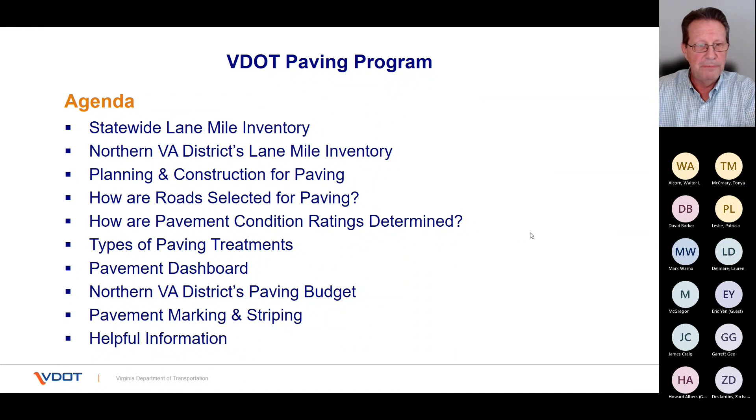So first of all, I just want to give the big picture. Up in Northern Virginia, we have over 14,142 lane miles in NOVA, which comprises Fairfax, Prince William, Loudoun, and Arlington counties. And then you can kind of see how many lane miles there are around the state for us to maintain.

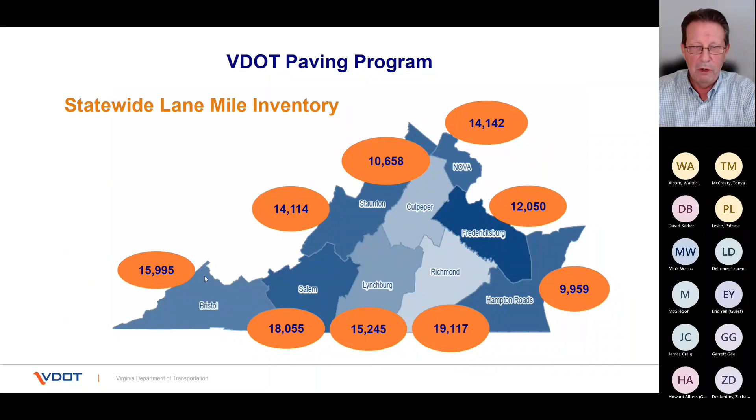In Northern Virginia district, Fairfax County comprises over 51% of those lane miles, the 14,200. Loudoun County makes up about 25% of it, Prince William 22%, and Arlington County 2%. The reason Arlington County's is only 2% is because they maintain most of their roads, where we maintain the interstates and some of the very large primaries.

So as I mentioned early on, we're already started into the paving construction season. We've had a very mild winter, and that allowed us to get started a little bit earlier this year in March, and we're actually catching up on a couple that got carried over from last year here in March and April.

And the season goes through till about October. We stop milling around early October so that we can finish up paving and then have enough warm weather after that to put down any pavement markings necessary to finish up the projects.

But every year we go through this process. It's an annual process. Right now, we're already gathering information for next year. During the summer and fall, we'll review that data, start setting up contracts and schedules preliminarily, and eventually during the late fall, we'll advertise those contracts to contractors for bids.

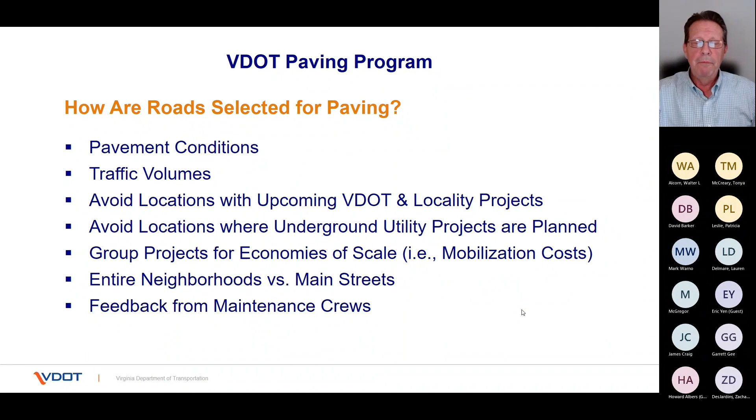So how do we collect the data? We use what are called ARAN trucks. They're automatic road analyzers. It's very technical, but has a lot of equipment on it.

It takes photo images and runs analyses to look at pavement distress, roughness, texture, and rutting. It does digital scanning, takes measurements and imagery and video, so that our infrastructure team can go back and look at some place that may show up as really bad or something strange.

They can go back and look into that data that's all recorded from these trucks. We have contracts with the makers and users of these trucks, and they drive the roadways and record it for us every year.

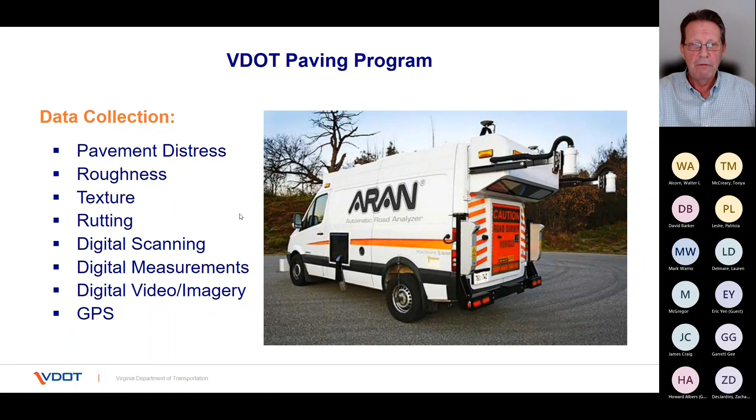So how often do we do it? Annually, we do this on the interstate roads, all primary roads, and all of our high volume secondary roads. High volume secondary roads are those that have an average annual daily traffic of 3,500 vehicles per day or greater.

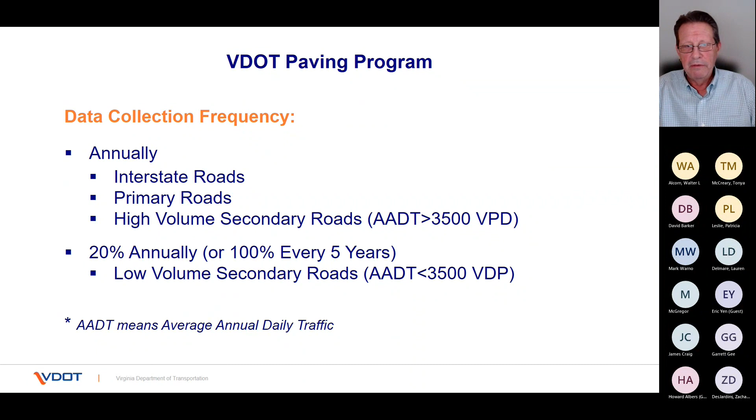Low volume secondary roads are those that are less than that 3,500, and we do those about every 5 years. Essentially, we get 20% every year because there's so many of them, so we get the full 100% every 5 years. Your low volume secondary roads are typically your neighborhood roads.

As a criteria set by the state, we have to meet what's called our critical condition index of 60%. That's the borderline between fair and poor. Obviously, if money were no object whatsoever, we would always shoot for excellent or good at least. But budget and available funds do come into play, and we have to set a target of expectation for ourselves and for the community.

So we have a 60% CCI or greater as being that target, depending upon the type of roadway. And you can kind of see the pictures here of the varying conditions, how they may look. I will say that when it comes to neighborhood roads, over 40% are considered very poor to poor.

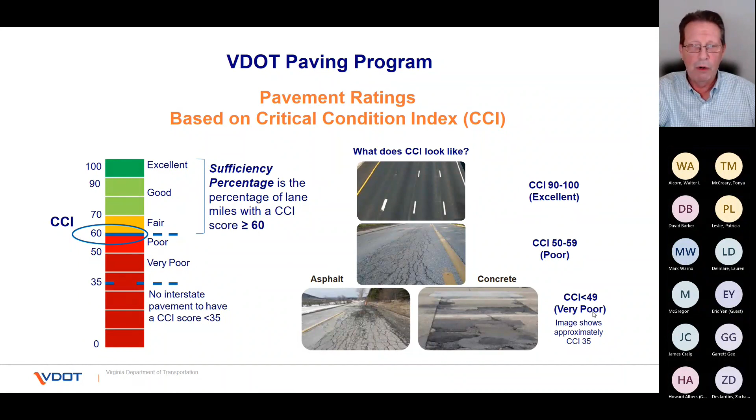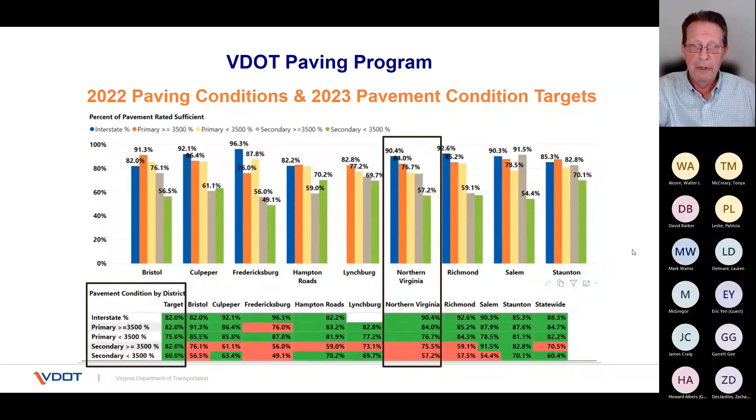The top layer is to provide preventive maintenance. For lack of a better comparison, I equate it to what many of us would do with sealing our driveways. We do a slurry seal, latex, and a chip seal. We do patching and crack seals, and that's to provide preventive maintenance allowing that pavement to last 2 to 5 more years until we can get to repaving that road.

Then what we call plant mix is what everyone would know as milling it, then overlaying it, and we do that anywhere from 2 inches to up to 4 inches deep, depending upon how bad the condition of the current paving is. In extreme cases, there are roads that are 70 years old that have been paved over multiple times, that originally was perhaps a gravel road and even at one time a horse path road, believe it or not, that goes back a long way.

In some of those cases, we will actually excavate the entire roadway and reconstruct it. That rarely happens, but it does happen in segments in some places where we have real problems with the roadway.

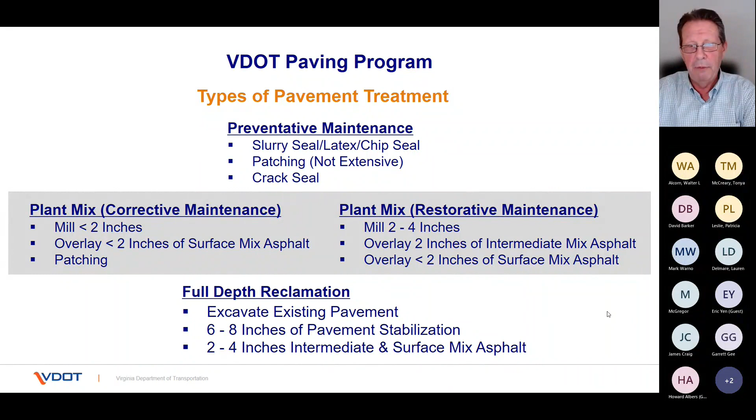So every year, one big question is what do we have as far as our budget goes. Our 2023 budget for this year is $123 million towards paving in Northern Virginia District. You can see that's somewhat on par with what we've been the last 5 years. It is slightly up from last year.

But with the cost of inflation, or the impact due to inflationary costs, it's a little greater cost to us in terms of cost per lane mile. So last year we were able to do a little over 1,000 lane miles. This year we're at 954.

One big difference is that we are applying over 80% of our budget on the secondary roadways, mainly on the neighborhood roads. As you saw earlier, the condition ratings for interstate and primary, we have achieved our goals and managed to maintain them, and we're still playing catch up on all the secondaries from the period of the late 2000s into the early 2010s when we went through a bit of a recession.

So our infrastructure and maintenance teams overall have determined that about 43% of our low volume secondary roads, or neighborhood roads, have a Critical Condition Index rating, CCI, in the 30s and 40s, which is considered very poor. That's why we're continuing again this year, as we have the last several years, to put a big emphasis on our neighborhood roads.

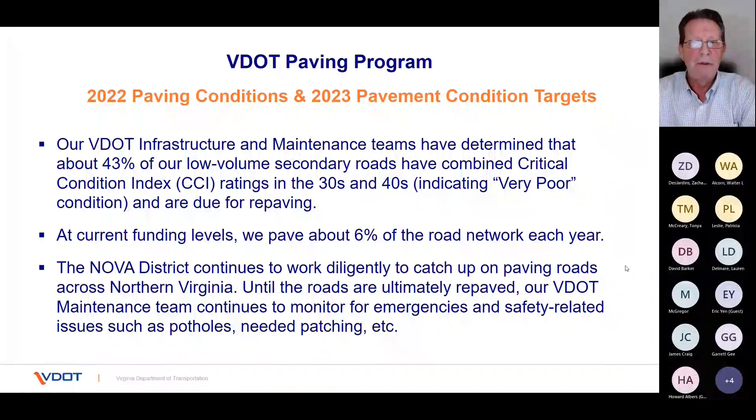So when we go out and repave roadways, it has existing pavement markings, and typically our contracts are set up to replace in kind. That is, we put back the double yellow center lines if that's what exists, the white edge lines if that's what exists, whatever may be there.

In the second bullet here, we sometimes do make some minor adjustments to add edge lines. We may adjust a crosswalk slightly if it wasn't quite perpendicular in the roadway. We may add what are called high visibility crosswalks, which are the kind of bar-like crosswalks you see, as opposed to two lines going across the roadway.

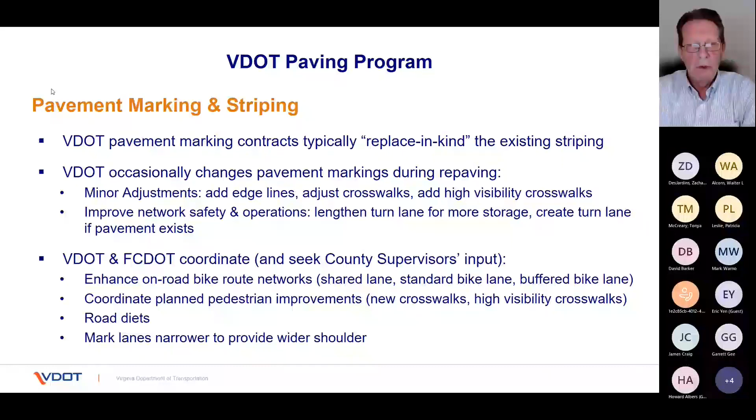So overall, if you at any time have a problem with a roadway, a pothole, deteriorated pavement, or some problem like that, you can reach out at the website shown on my screen at my.vdot.virginia.gov, or call the number shown on the screen, 1-800-FOR-ROAD, to let us know about a problem, and we'll contact our maintenance department, have them go check it out, and try to address it.

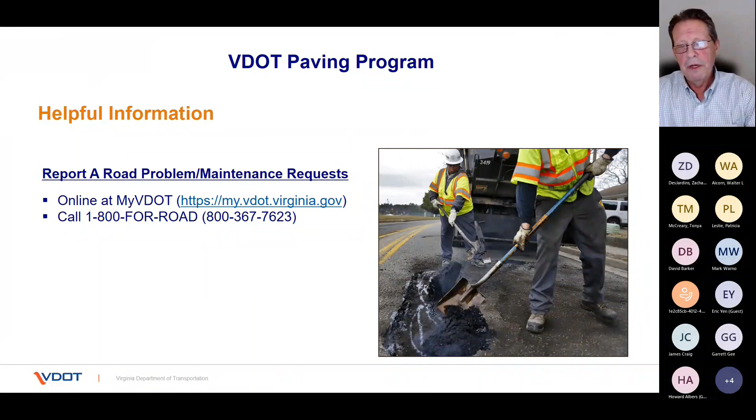So for the second part of the presentation, I wanted to jump back to show you how to use what I showed earlier as a static image of the 2023 paving program. Give me one moment to change screens here.

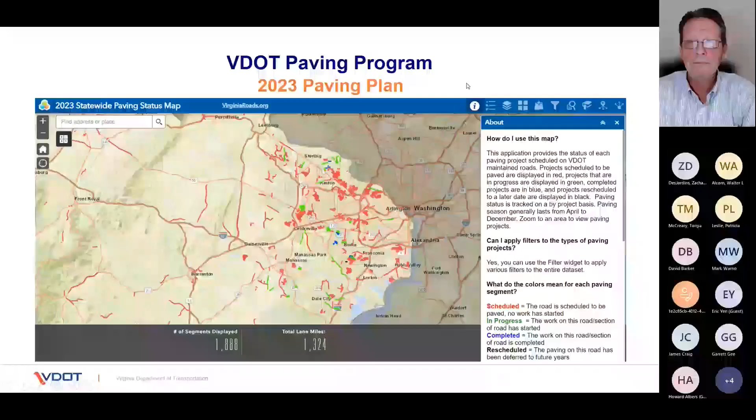All right, can you see my screen with sort of an image of what I showed you earlier? Okay, good. All right, so I'm going to back out a little bit.

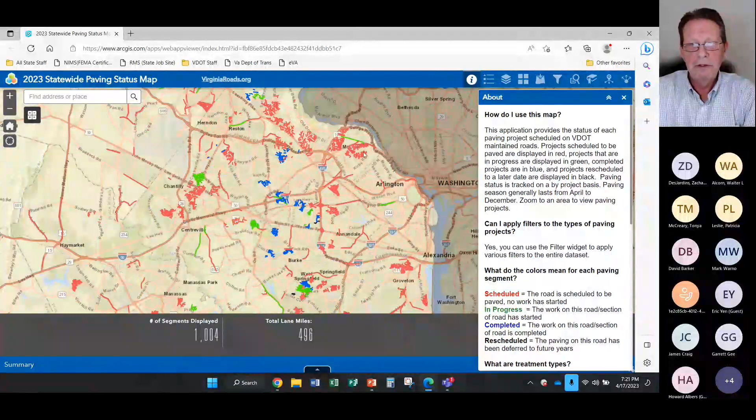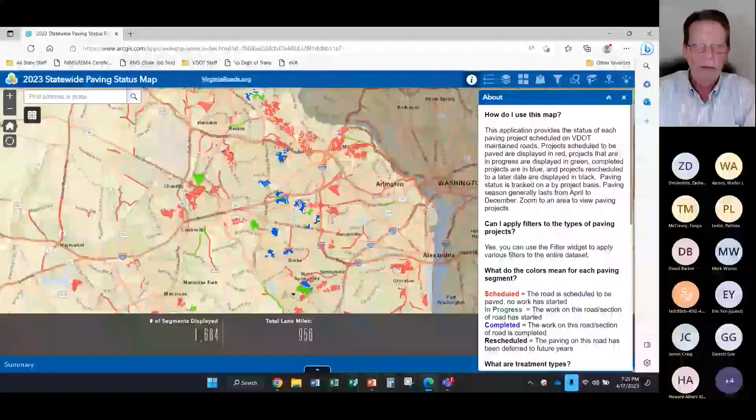You can kind of see this is all of Northern Virginia, with the Loudoun Dulles Airport and Loudoun County line over here, Prince William County line down that way. So looking in the center, in the Hunter Mill Providence area, and zooming in a little bit, you can see Vienna. You can see where some roads or neighborhoods in particular are going to be repaved, as well as some of our interstates and a couple of our primaries. And you can see several in blue that we've actually already completed.

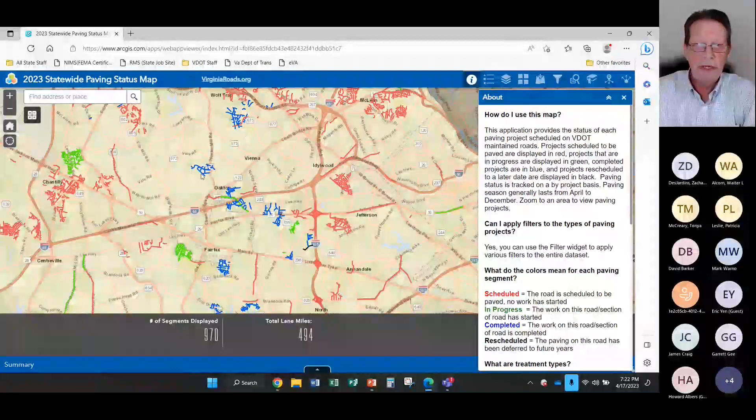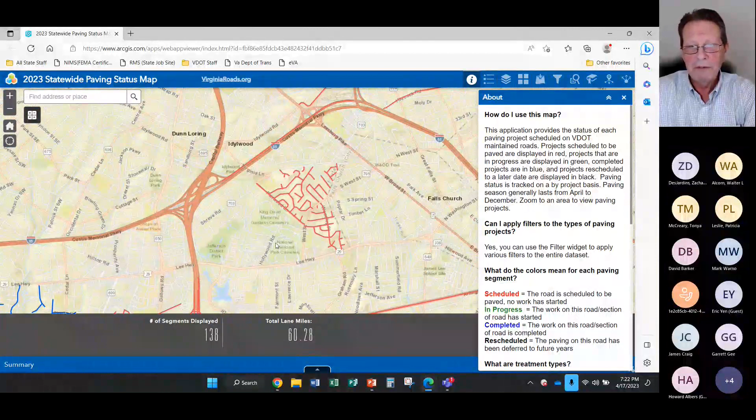One thing I wanted to show everyone about this map is that everyone can use it. It's on the link. If you have any questions about your neighborhood, I'm going to focus in on this one right here for the moment, called Poplar Heights, next to Westwood Park off of Shreve Road. What you can do is click on that roadway, and it brings up a dash that shows you the project manager name from VDOT, their phone number, their email address, and what contractor they're using to perform the work.

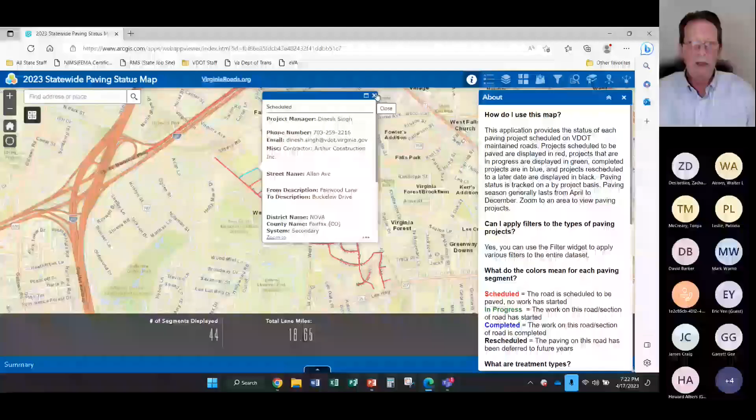One thing I want to explain is our contractors are given not a certain week or even a certain month that the work has to be done—they're given a period of time. In other words, from notice to proceed in early or mid-March through maybe August of this year, depending upon which neighborhood it is.

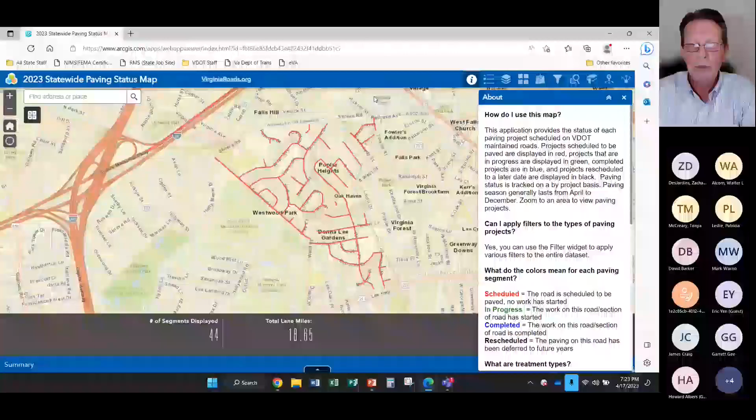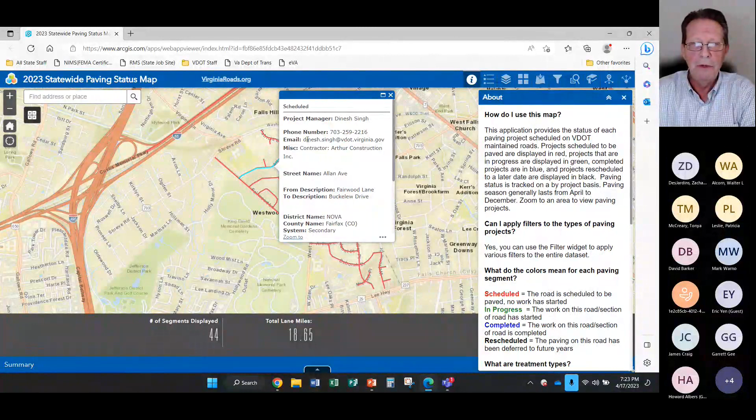So if you have a question about when they're coming to your neighborhood, or during the process of them paving there's an issue or question that you have as a citizen, you can call this up and write an email to that project manager, and they will circle back and answer your questions.

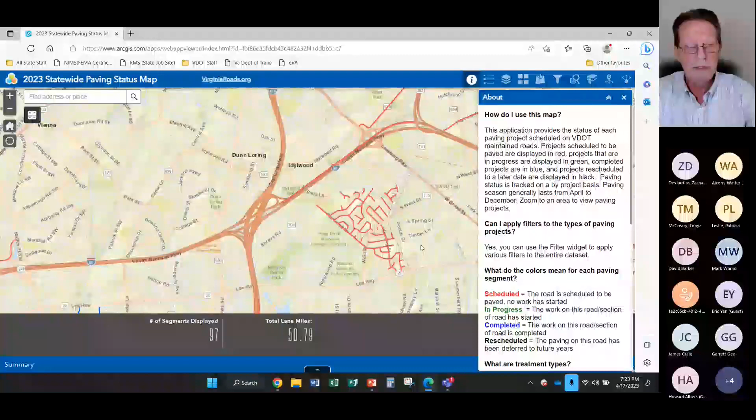So that's pretty much it. This link can be found in the presentation, which I'll be providing to both supervisors in PDF form, so they'll be able to post it on their newsletter. At the end, I'll be glad to answer any questions. In the meantime, I'll back out and stop sharing.

Thank you, Steve. Thank you. All righty.

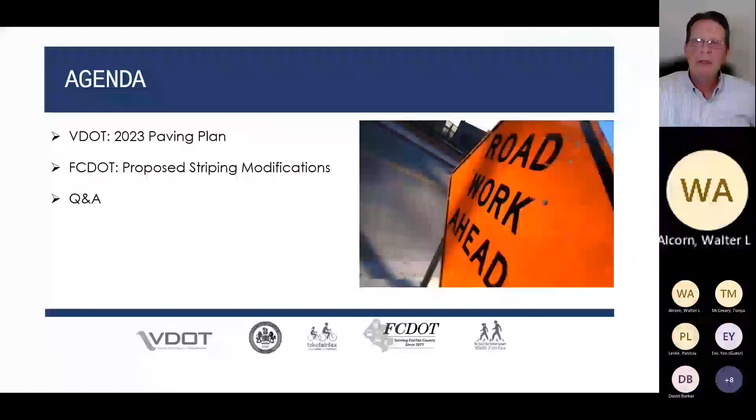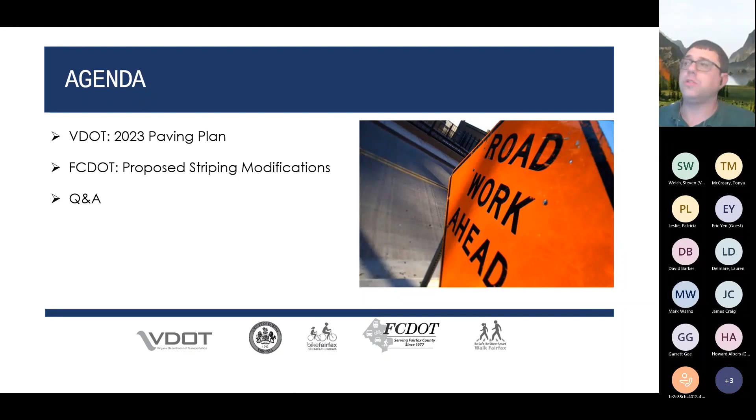For proposed striping modifications in Hunter Mill and Providence districts, as Steve mentioned, this is a collaboration between VDOT and FCDOT. We'd like to collaborate to improve traffic safety for all users. We at FCDOT review the draft paving plan and look for opportunities for improvements, typically new crosswalks and bike lanes. VDOT will develop the striping and signage plans. Fairfax County leads the public engagement, such as meetings like this, and coordinates with each district supervisor. VDOT also looks for substandard curb ramps and whatnot to improve accessibility.

Fairfax County DOT actually does the signage. So if we do a new bike lane or a crosswalk or a road diet, Fairfax County helps install the signage for those.

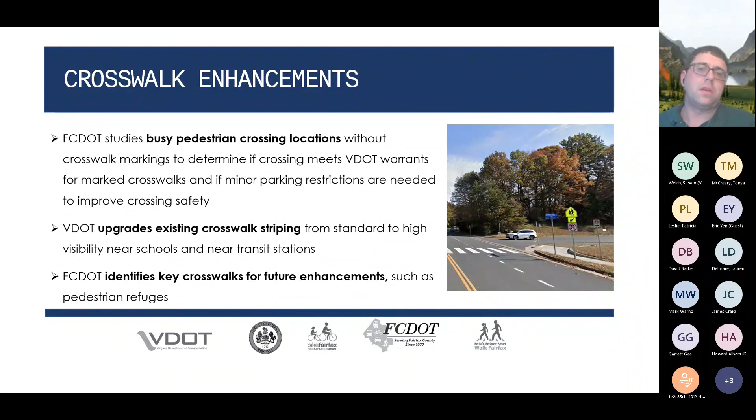We also look for key crosswalks for future enhancements, such as adding pedestrian refuge islands. We also try to repurpose some underutilized road space.

Many of our roads in Fairfax County were built with wider than needed travel lanes, or simply have too many lanes, which leads to safety issues such as speeding and inattentive driving. Repaving provides an opportunity to right size the travel lanes and even provide new bike lanes and turn lanes to improve safety for everyone at a very little incremental cost. During repaving is the cheapest and most efficient way to do those kinds of projects.

At signalized intersections, traffic capacity is typically maintained and legal on-street parking is usually maintained. This process also helps us build out our planned bicycle network.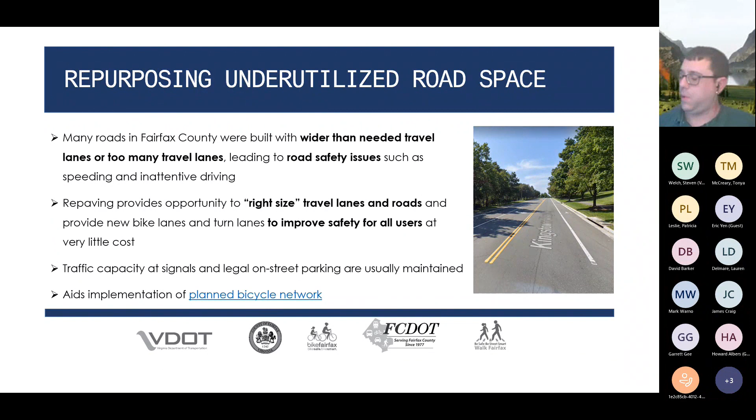As an example of this traffic calming effect, down in Mason District on Annandale Road, the lanes are quite wide, so people could speed relatively easily. But after we were able to add bike lanes during the repaving process, the speeds were able to decrease.

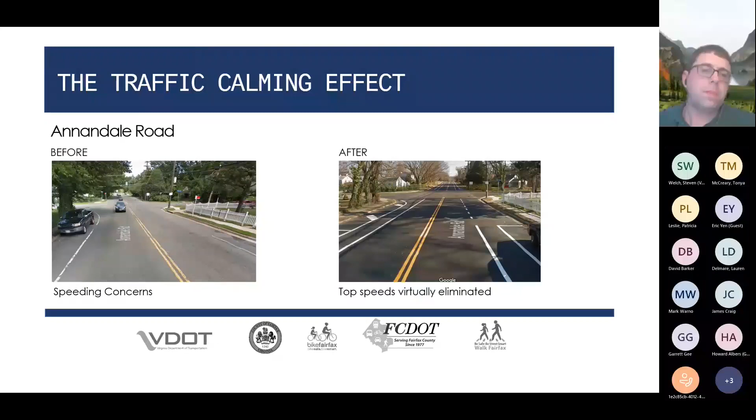In terms of types of bicycle riders, we have the strong and fearless, enthusiastic, confident - combined about 10% of our potential bicyclists, and they will primarily use standard bike lanes. But a lot of folks, about half of potential cyclists, are interested but concerned, and they prefer trails and buffered bike lanes.

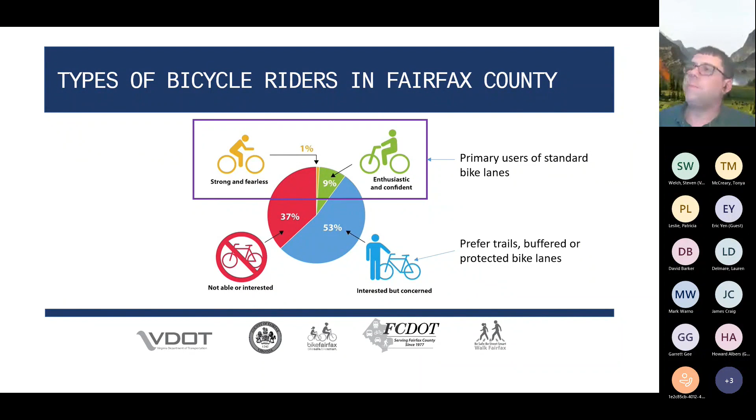There are benefits to adding bicycle infrastructure besides just benefiting people biking. It helps reduce the crossing distance for people crossing the street. Bike lanes add a buffer between pedestrians and moving traffic, making it a more comfortable and safe place to walk. Bike lanes also help reduce noise because they discourage people from speeding in the narrower roads, and they improve visibility in travel lanes, making it easier to exit a driveway or onto a side street.

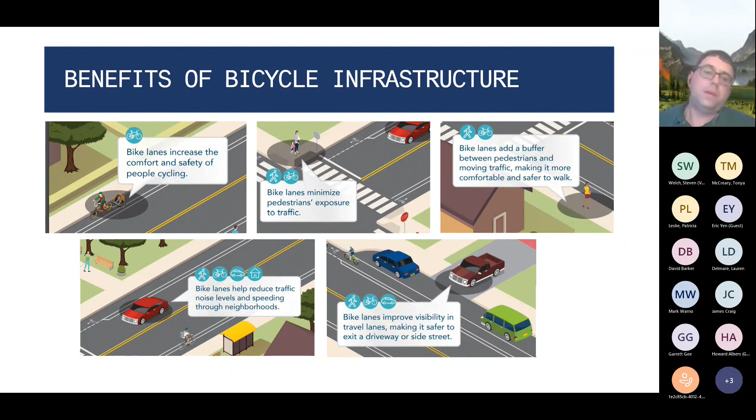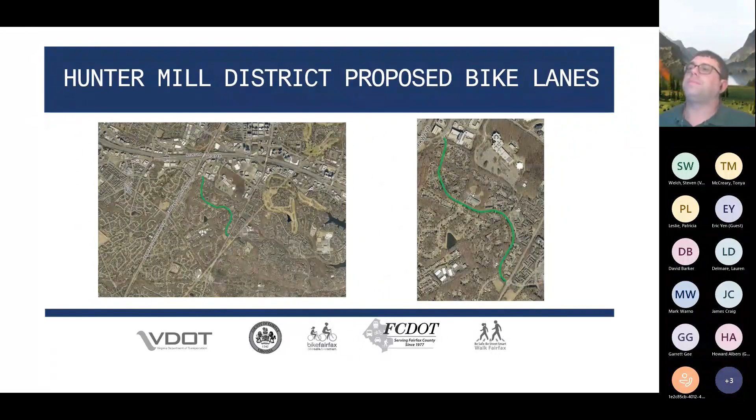For Hunter Mill District, we're proposing bike lanes on Glade Drive between Reston Parkway and Sunrise Valley Drive. Right now, if you go out today, there are two wide travel lanes and two parking lanes. There's a sidewalk along the north side of Glade Drive, except between Cocquina Drive intersections, and there's also a sidewalk on the south side, except between Green Range Drive and Rosedown Drive. There are no on-street bicycle facilities, but there is an existing trail at the Reston Parkway intersection.

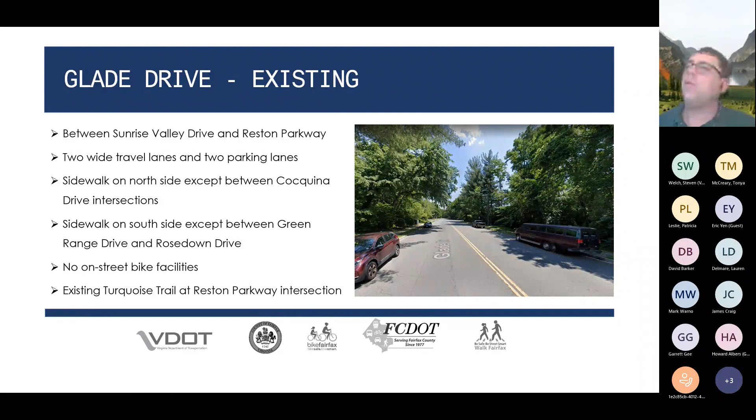We propose to add bike lanes by narrowing the travel lanes between Sunrise Valley Drive and Reston Parkway. It provides a bicycle connection between the side path on Sunrise Valley Drive, the Fairfax County Parkway Trail, which stops just a block from the side path, as well as the turquoise trail down at the southern end at Reston Parkway. All legal street parking will be unchanged.

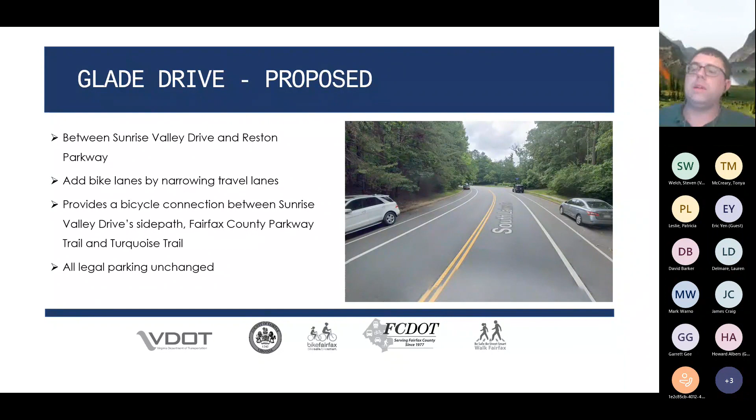We're also proposing to add a crosswalk at the intersection of Monroe Street and Monroe Manor Drive. This connects two neighborhoods to each other, as well as connecting to a playground and Frying Pan Farm Park. There's actually no crosswalk on Monroe Street south of the intersection at Frying Pan Road. And again, this is for Hunter Mill.

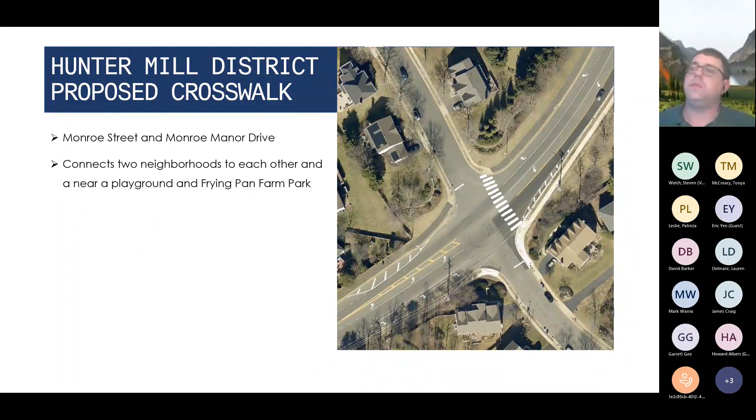For Providence District, we have 4 potential bike lanes. As Steve mentioned earlier, there's some economies of scale, and this is one of the reasons why all of these streets are slated to be repaved.

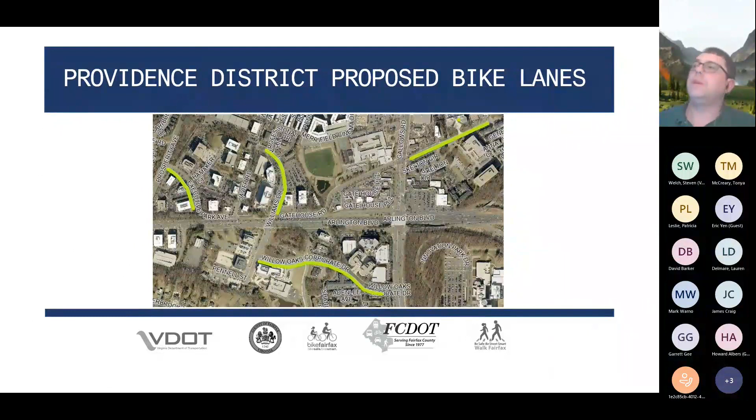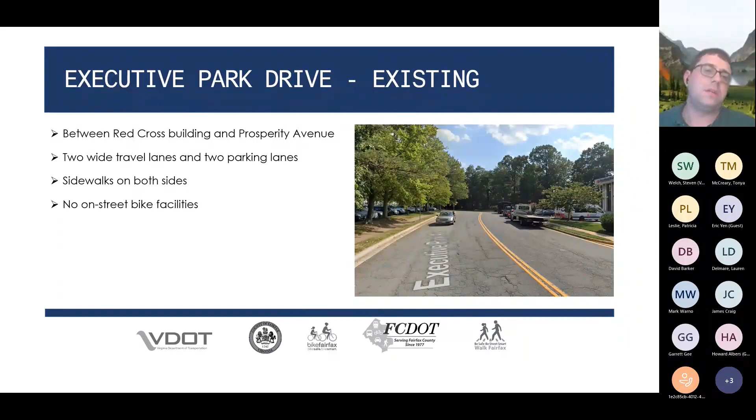Executive Park Drive today runs between Prosperity Avenue and the Red Cross building. There are 2 wide travel lanes and 2 parking lanes, sidewalks on both sides, and no on-street bicycle facility. We're proposing to add bike lanes by narrowing the travel lanes and repurposing an underused parking lane. This provides a nice east-west bicycle connection parallel to Arlington Boulevard. If you're wondering why we're ending the bike lanes at the Red Cross building, the street narrows to the minimum width for travel lanes, so we could not fit bike lanes anywhere further down the street.

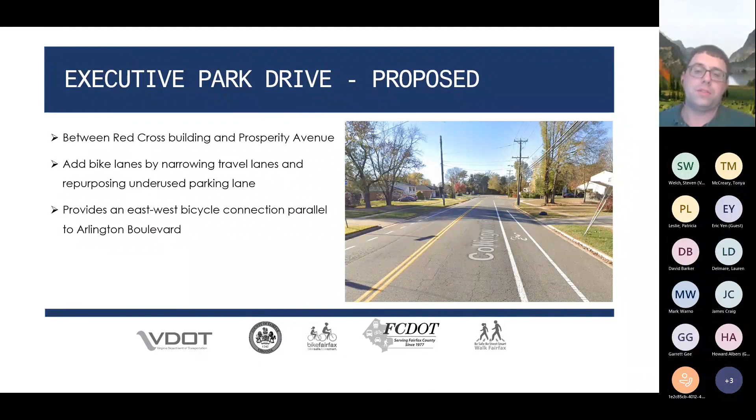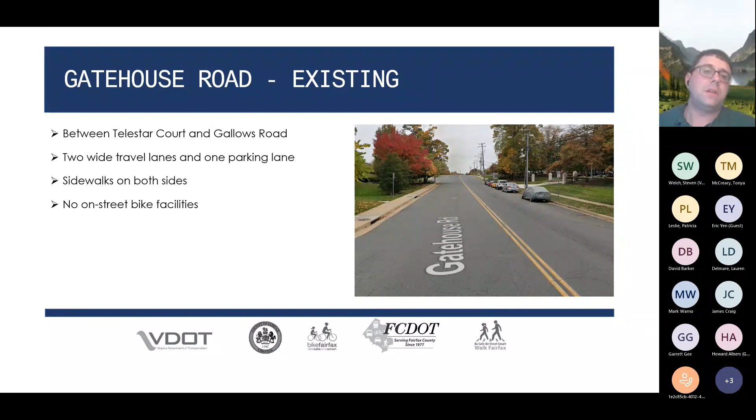On Gatehouse Road between Telestar Court and Gallows Road, right now there are two wide travel lanes and one parking lane. There are sidewalks on both sides, and there's no on-street bike facilities. We're proposing to add bike lanes by narrowing the travel lanes and repurposing the underused parking lane in front of the now former INOVA office building. There are approximately 6 on-street spaces that are there today. This provides an east-west bicycle connection, kind of parallel to Arlington Boulevard. It connects to the Gallows Road side path.

To the right is a photo of Merrilee Drive, and it shows there 2 buffered bike lanes and then 2 travel lanes.

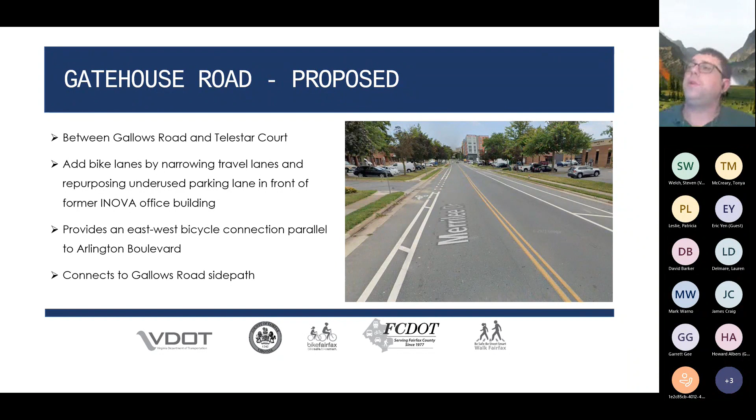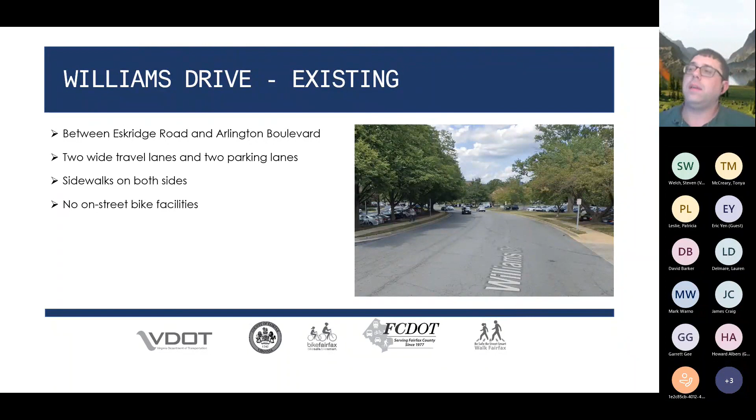Another street we're looking at is Williams Drive between Eskridge Road and Arlington Boulevard. Right now there are 2 wide travel lanes and 2 parking lanes. There are sidewalks on both sides, but no on-street bicycle facilities. We're proposing to add bike lanes by narrowing the travel lanes and repurposing the underused northbound parking lane. We'll retain the 18 parking spaces along the southbound side. This is a useful north-south connection, running between the INOVA Hospital and going north towards Merrifield Town Center.

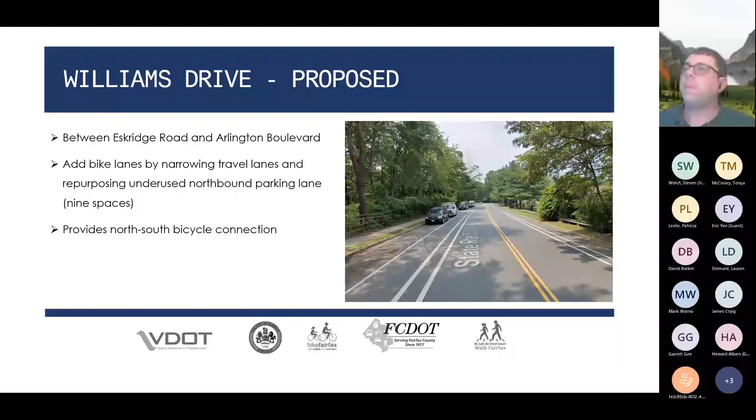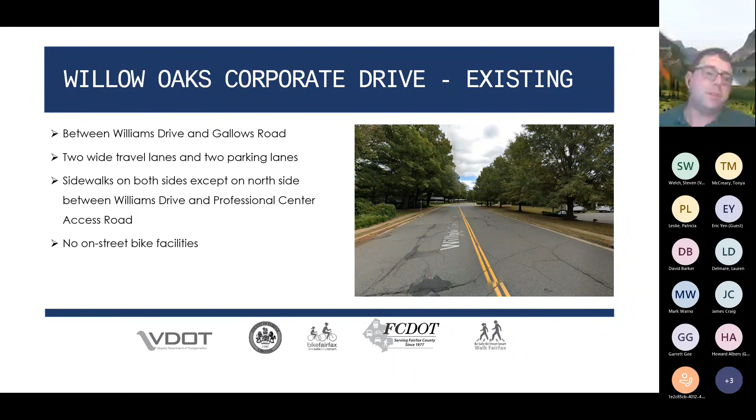A little bit closer to Inova Hospital is Willow Oaks Corporate Drive, which runs between Williams Drive and Gallows Road. Today there are 2 wide travel lanes and 2 parking lanes. There are sidewalks on both sides, except on the north side between Williams Drive and Professional Center Access Road, and there are no on-street bicycle facilities. We propose to add bike lanes by narrowing the travel lanes and repurposing one of the underused parking lanes. We would also repurpose all of the parking west of Professional Center Access Road. It provides a nice east-west connection.

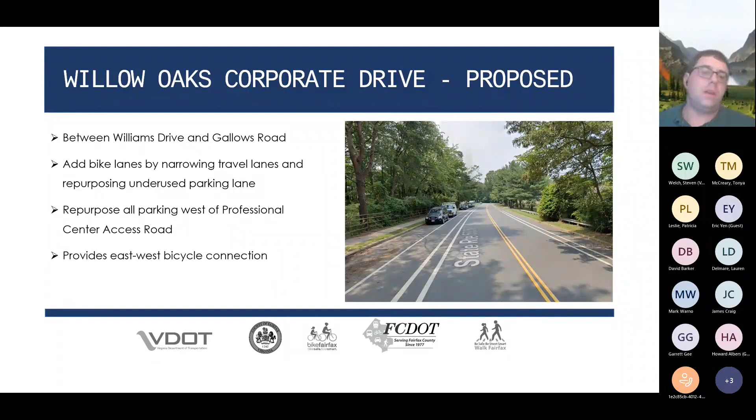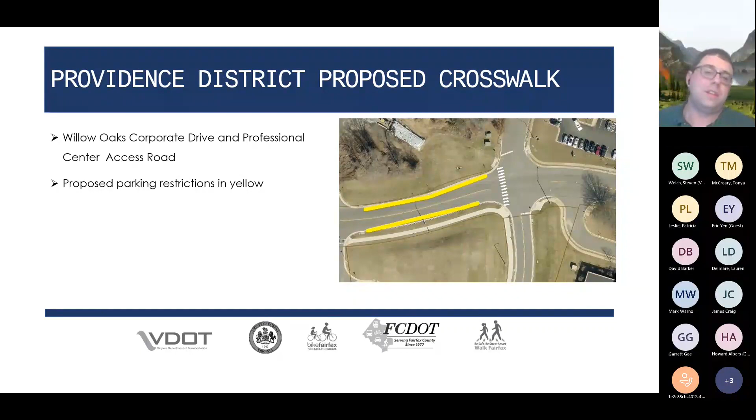As Steve mentioned, for paving related comments such as drainage, missing signage, signal repair, walkway repair, or sight distance issues due to the growth of vegetation, please feel free to submit them to the myVDOT portal at my.vdot.virginia.gov. You can also give them a call at 1-800-FOR-ROAD.